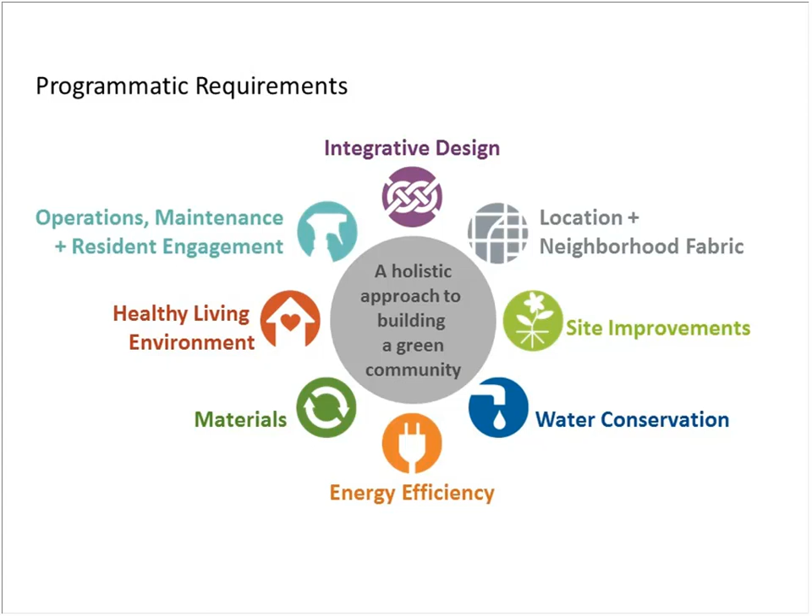While that's happening, this is part 2 of the seminars for Zero Energy Ready Home. In part 1, we gave you the business case for why affordable housing stakeholders should be really excited about building Zero Energy Ready homes, how incredibly aligned that product is with their mission. And we showed you the simple lift to go from the Enterprise Green Community Guidelines to move up to the Zero Energy Ready Home specifications.

Today what we'd like to do is give you tools so you can actually do this successfully, and that's going to be the Building America Solutions Center. But to begin, I want to once again review the fundamental building blocks for how we get to zero. So what is zero? How do we get there is the first discussion I want to cover before I hand off to my partner in crime, Chrissy.

So it all begins with this new risk reality. Codes have been moving along, and as you can see over time, the vertical axis is the energy use index. The index keeps getting lower and lower, meaning that the codes themselves are getting much more rigorous. In fact, if you look at the difference between 2006 and 2012 International Energy Conservation Code, the rigor has increased almost 40%. The codes have really gotten to the point where we're building a much, much more efficient home.

And in the process, that has put us in the risk zone. So a lot of what we're doing with the Zero Energy Ready Home specifications is addressing the risk and the opportunities to provide truly affordable housing to American homeowners. So let's look at how we address that risk.

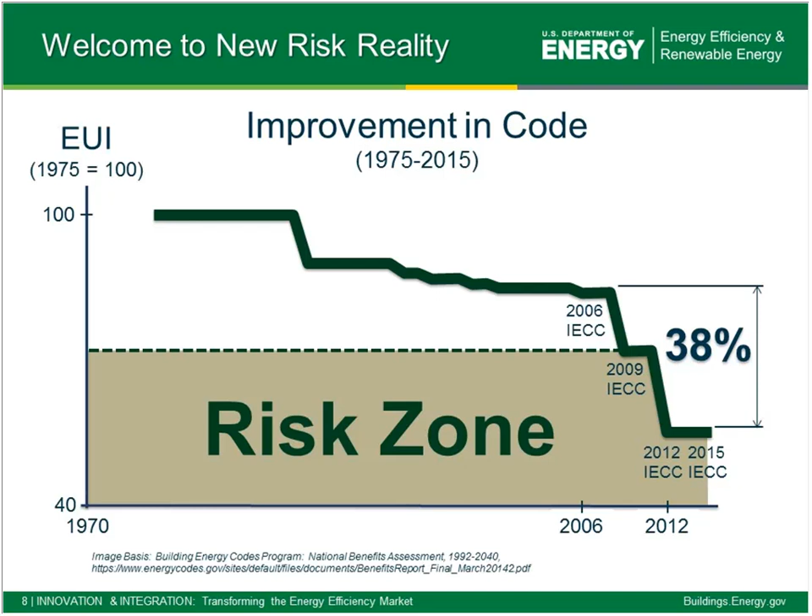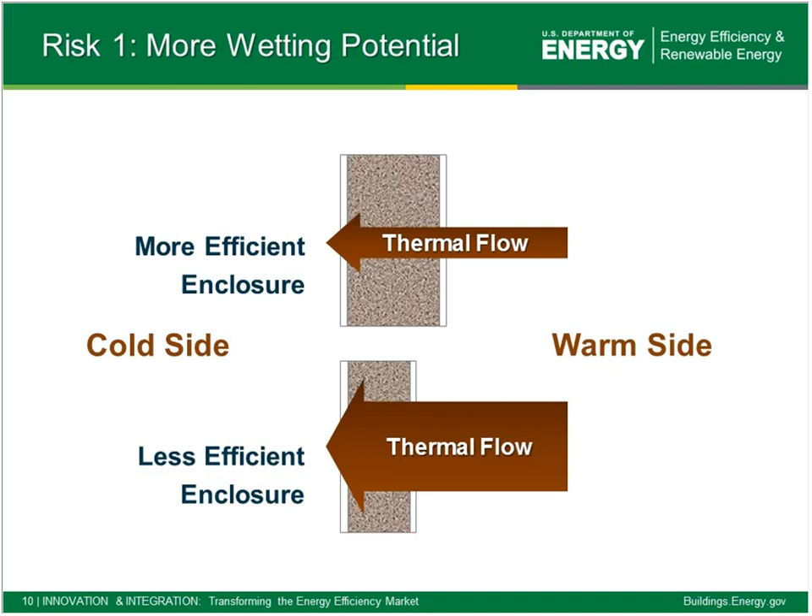It starts first by recognizing that this advanced enclosure, even with a code home, is much better insulated and much more airtight. So we have a diagram showing a more efficient enclosure assembly in the top, a less efficient enclosure assembly in the bottom. And if we have a warm side and cold side, heat flow goes from more to less heat, and so we have a lot more thermal flow going through a less efficient enclosure than through a more efficient enclosure.

And the result, of course, is that we now in high efficient enclosures have much colder surfaces inside the cavity on the cold side of the building. And that's only because there's so much less heat flow and airflow going through the assembly. And that's just a reality we have to live with. So that means if the building is built more efficient, it can't dry, and therefore it has no tolerance to getting wet. And so we have to address this risk of a greater wetting potential since it doesn't dry.

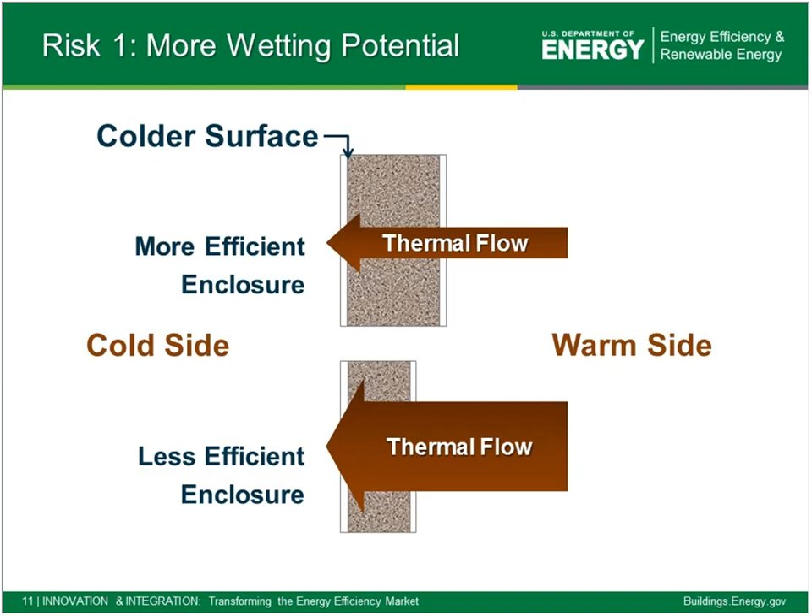Which brings us to risk number 2. Again, we have a lot more thermal flow going through the less efficient enclosure than the more efficient enclosure. And what that means is that we need a lot less BTUs, a much smaller BTU machine, which most of us call heating and cooling equipment. So you need a much larger comfort system for the less efficient enclosure and a much smaller comfort system for the more efficient enclosure, which needs a lot less heating or cooling BTU for comfort.

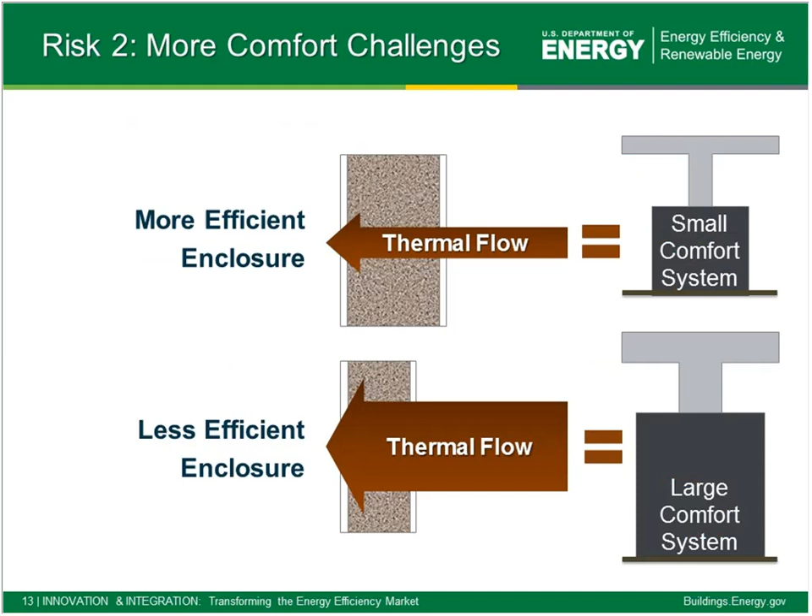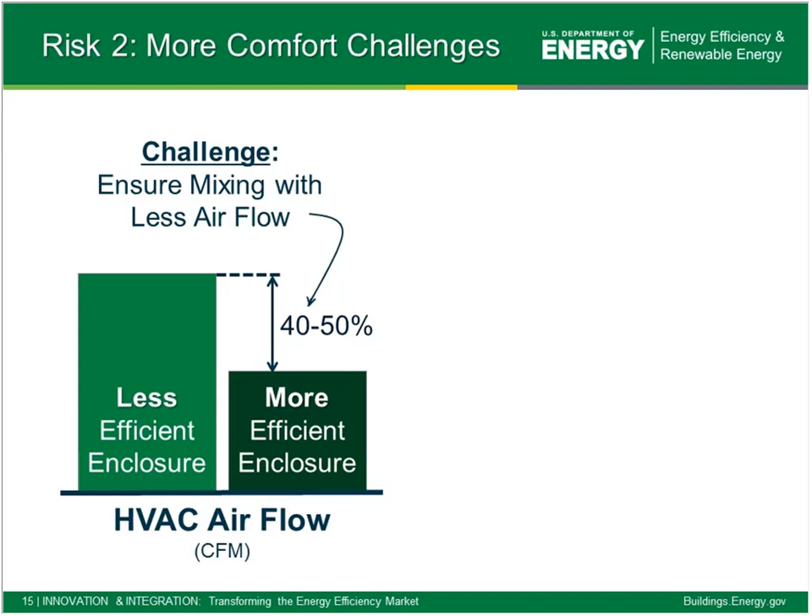And a couple things happen from this. First, there's about 40 to 50% less airflow in the more efficient enclosure because there's a lot less heating BTUs flowing into the building from the equipment. And that's an issue or a challenge because we, up to this point, are not very diligent designing heating and cooling equipment systems that move air efficiently. We don't design the ducts, we don't manage static pressures, we don't ensure proper mixing in the room, and so with that reduced airflow, that challenge is even more difficult. So we have to make sure that we address that challenge.

The second challenge is based on the fact that the more efficient enclosure has a swing season that's 2 to 3 months longer than the less efficient enclosure. In other words, you may not start heating into November instead of October. You may not start cooling until the middle of June instead of the beginning of May. So you wind up with maybe 2 to 3 months where you have no space conditioning load. And the challenge there is, where's the humidity control going to come from when there's no sensible cooling load? And normally a lot of dehumidification depends on the accidental byproduct of the cooling that we're getting from a sensible load.

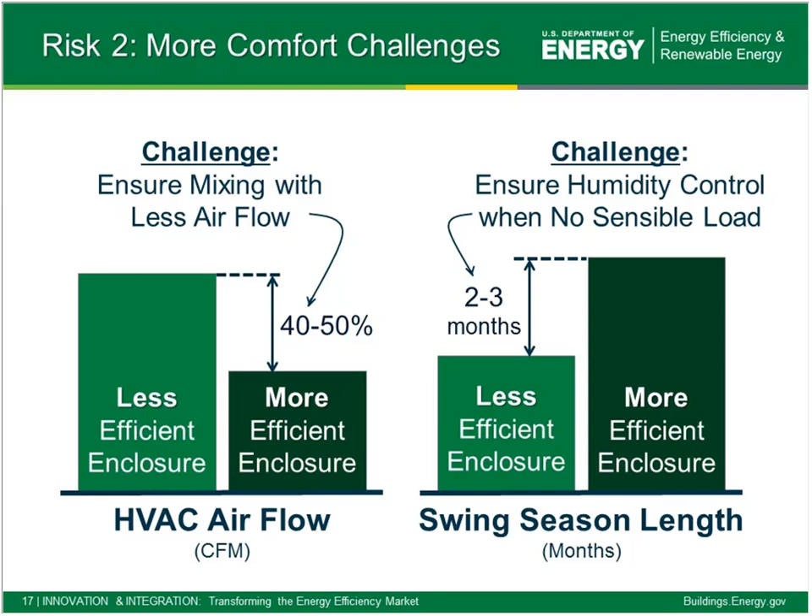And that brings us to risk number 3, which again starts with the fact that the more efficient enclosure compared to the less efficient enclosure is built with much more insulation and a lot tighter, so there's a lot less airflow in the more efficient enclosure than the less efficient enclosure. And that means that we're not getting the same amount of dilution, and so we have a lot more potential to accumulate contaminants in the more efficient enclosure. And we have to manage that risk as well. And it can be code, above code.

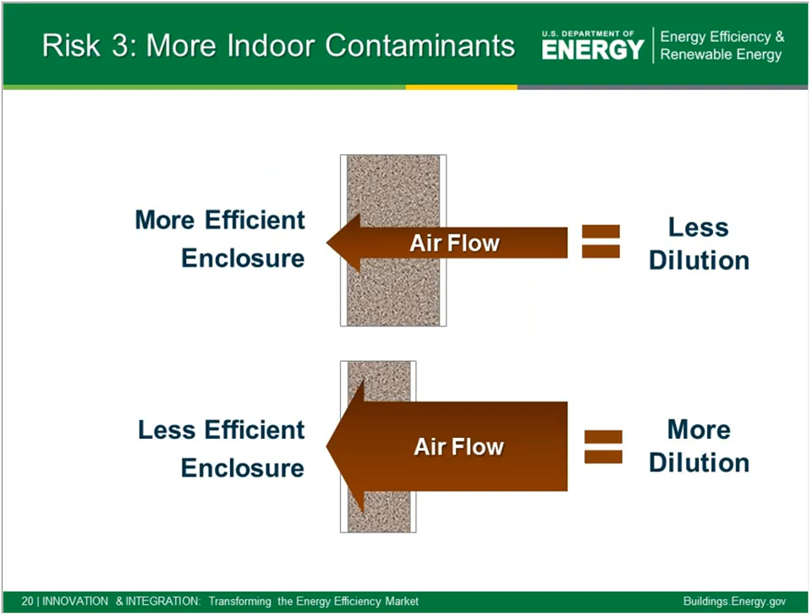This is the new reality that we're in. And this drives a lot of what we're trying to do with the Zero Energy Ready Home specifications and what we think fundamentally creates the building blocks for how you get to zero. It's basically a risk management strategy.

So most cases you're starting with code. We recommend it's not affordable to build to code. You want to build to the next code cycle that's already coming down in the future, locked in to happen. It's like building a home for a family that will be obsolete or even illegal to build in 3 or 4 years if we build to the current code and not a future code that's already in the books and more efficient. That's just not affordable to strap a low-income household with a product that will be obsolete.

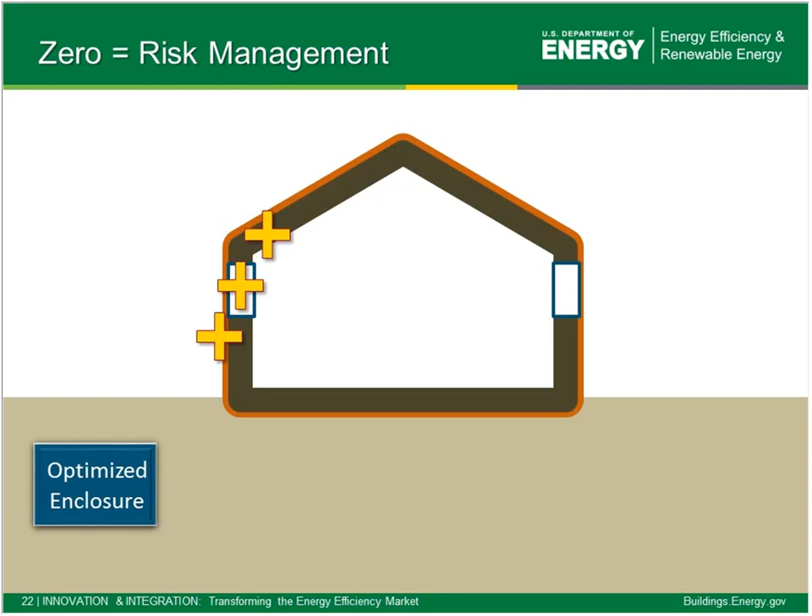So we want to build to the next generation code, what we call an optimized enclosure. And generally that will have a little more air tightness, a little more insulation, a little better window, but we're optimizing the enclosure cost effectively. And that's really important in optimizing efficiency.

The second thing you want to do is address that the total energy use leaves more than 50% consumption for all the things inside our home, equipment, appliances, fans, lighting, plug loads, all those things are now accounting for more than 50% of the energy use, so we need energy efficient components throughout the house. These two strategies together ensure an ultra efficient home. What a great start. Absolutely where you want to be for an affordable household.

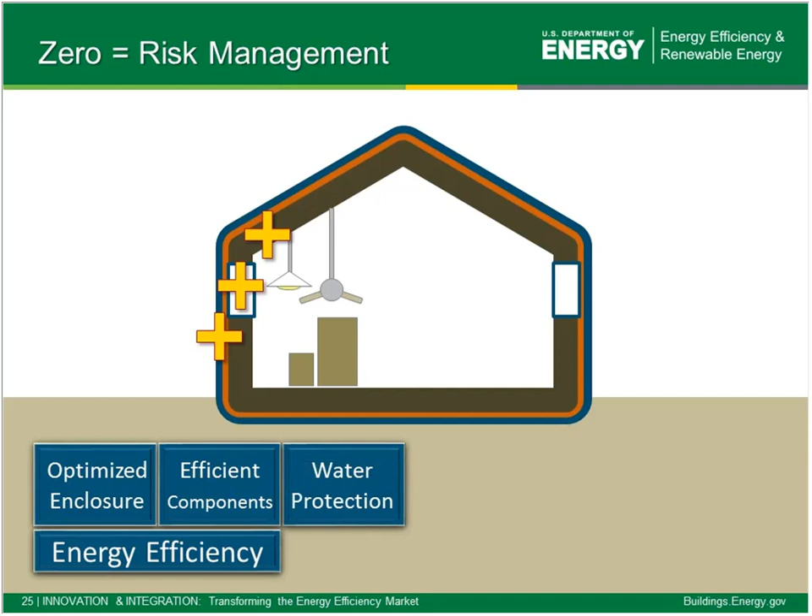The next building block is complete comprehensive water protection to manage that risk that the building cannot dry if it gets wet. Too well insulated, too little drying potential, there's no room for mistakes. You need comprehensive water protection.

The next building block is ensured comfort, a system that actually ensures airflow, mixing, and humidity control during longer swing seasons, particularly in climates that get humid in the summertime. So you want an ensured comfort system, absolutely critical for affordable housing or any housing.

And the third building block is a comprehensive indoor air quality package, including source control, keeping pollutants out of the materials we're using and stopping them from entering the home; dilution through a fresh air system that effectively dilutes contaminants that still can gather in the home; and finally high capture filtration, so you actually remove very significantly impactful particulates in the air that really account for most of the respiratory illnesses that can happen in homes.

This bundle of improvements is basically our performance package that helps us manage the risks we talked about.

And finally, the last building block is that the home is so ultra efficient, has such low energy use, and such good performance, it's ready to last and provide total performance. But wouldn't it be great if it can meet the future opportunity to go to zero as solar system costs keep getting lower and lower? Even for affordable households, shouldn't they have the opportunity to go to a zero energy bill? So simple low cost, no cost details and practices enable that to happen, and they comprise a zero-ready solution.

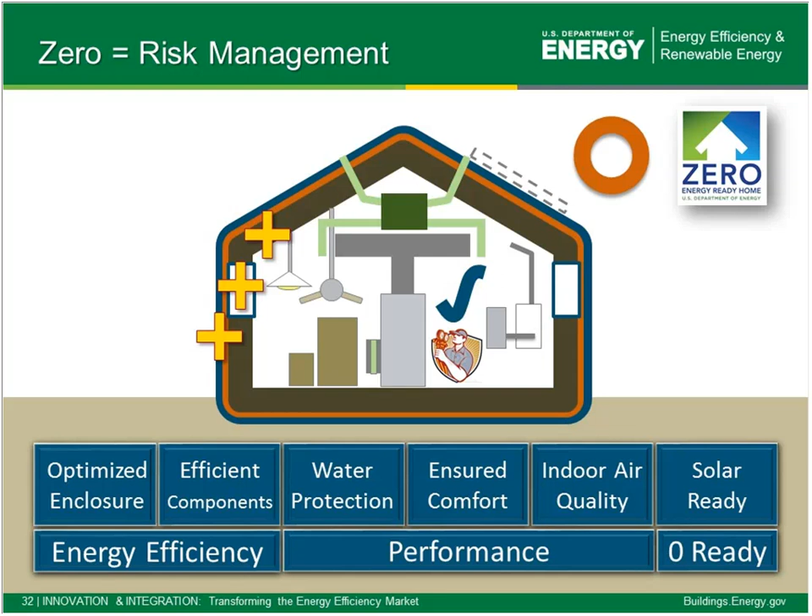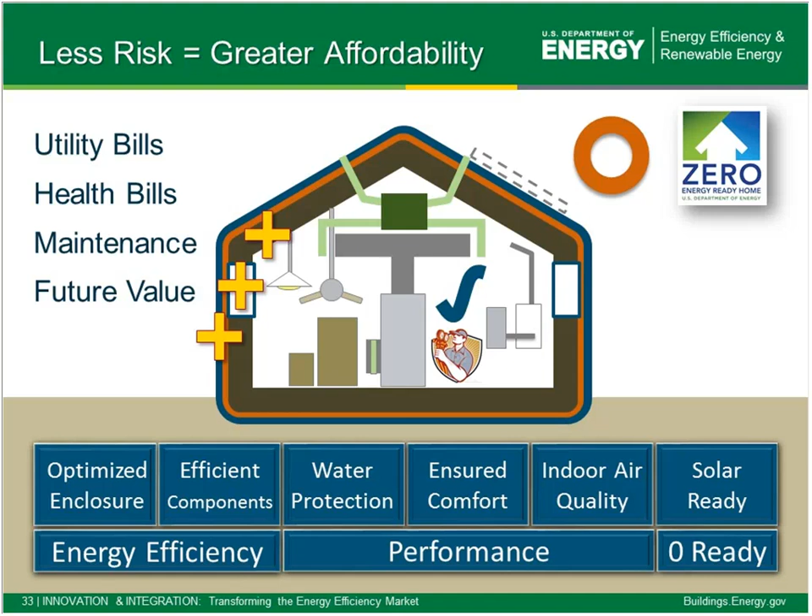And the greater affordability outcomes will be lower utility bills, some opportunity to really significantly improve health and lower health bills for homeowners, substantially reduced maintenance over time, and protection of the family's investment—particularly in affordable households' case—so that their home will meet future expectations, more likely hold its value, and actually have opportunities to appreciate at a faster rate. This is a truly affordable house everyone would want.

So what does it look like in reality? Are we making this up, or is this actually happening in the marketplace? The great news is that it's happening over and over—thousands and thousands of homes are being built this way. Here are just a few examples from the affordable housing sector.

Here's a Habitat for Humanity project in the Grand Traverse region, Michigan. These homes are approximately 1,350 square feet. With solar, they're scoring -1 on the HERS index. The average monthly utility bill was about $9, mostly the service charge just to be hooked up to the utility—and again, almost $40,000 saved over a 30-year mortgage. And again, this quote: 'I couldn't afford to pay for rent and groceries and gas before owning my zero energy ready home.' What a difference for an affordable family.

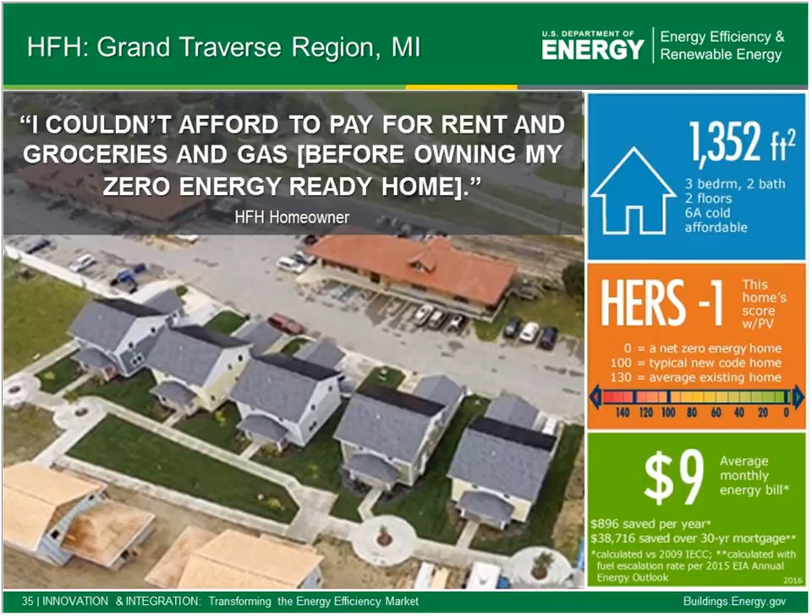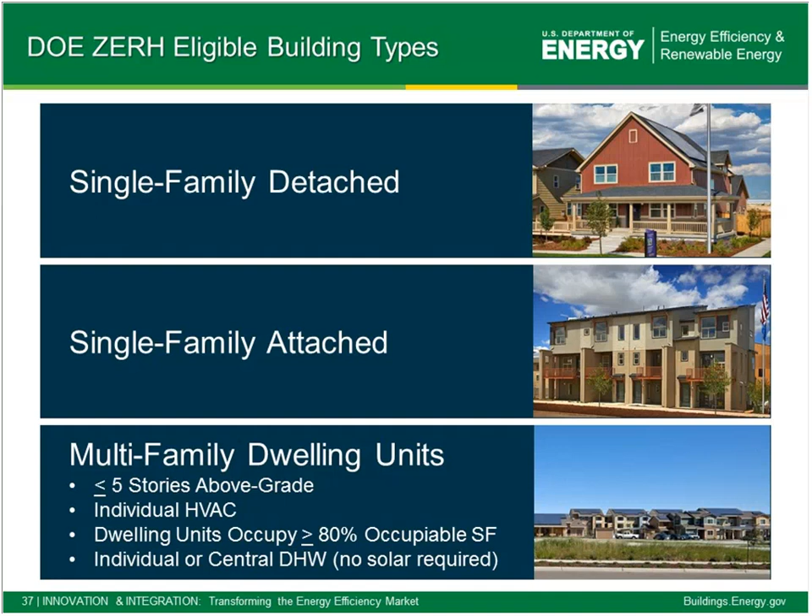So we have lots and lots of these examples, and I do not want to use up any more time except to say: look for applying zero energy ready home strategies for any type of project—single family detached, single family attached, multifamily projects up to 5 stories above grade. These are all ready to go to zero energy ready kind of performance.

And before I hand off to Chrissy, some resources and next steps. If this makes sense for you, go to our website. There'll be opportunities for you to quickly become a partner, review our program specifications in full detail, take the tour and see as many homes as you'd like with all the statistics and experiences featured in the case studies here.

There are over 24 webinars that give you even more detailed guidance. There's a marketing toolkit, and there's a gap analysis between the enterprise green community specifications and the zero energy ready home specifications to clarify the jump between them. And lastly, the greatest resource on the website is the Building America Solution Center. This is your new best friend if you have anything to do with high performance housing, with many applications, solutions, and ways to use this tremendous resource.

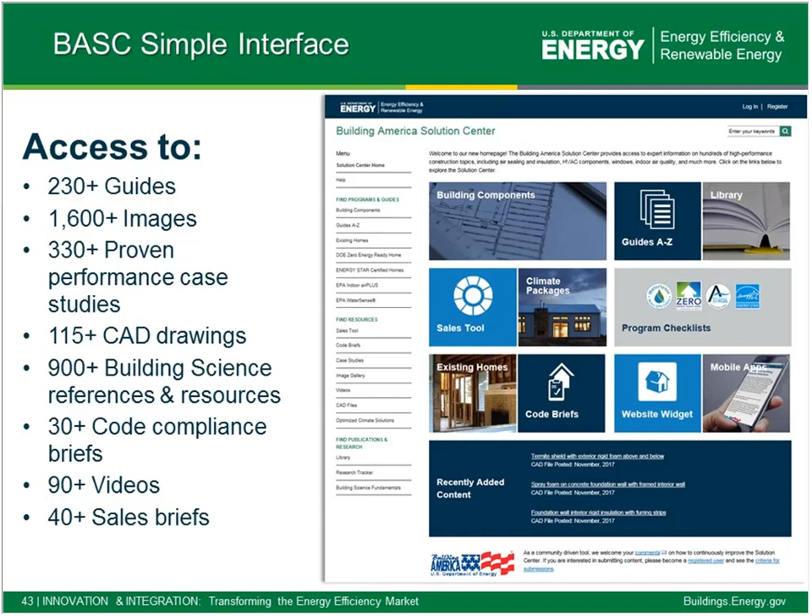Each guide is formatted in the same way, with tabs across the top. Each tab provides specific content within the guide. I'm going to walk you through those tabs and talk you through how we specify each of these.

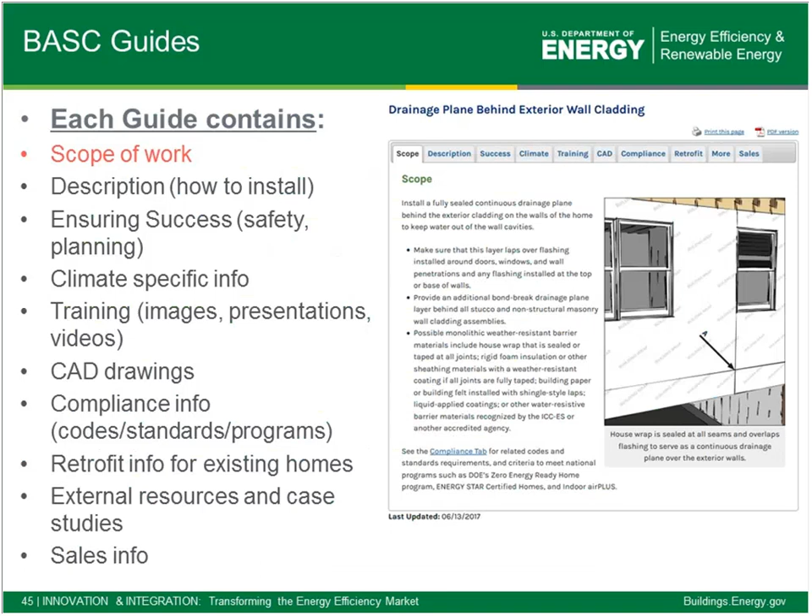The first is called the Scope tab. It's a scope of work, really designed to be a succinct how-to for applying a measure that you could put directly into a scope document for a contractor or a builder.

The second is the Description tab. This is step-by-step instructions for how to install the particular measure. We'll give you images, links to Building America research, and step-by-step instructions as well.

The Success tab will provide you with background information. It'll also provide health, safety, and planning information — anything you need to know before or during the process of installing the particular measure.

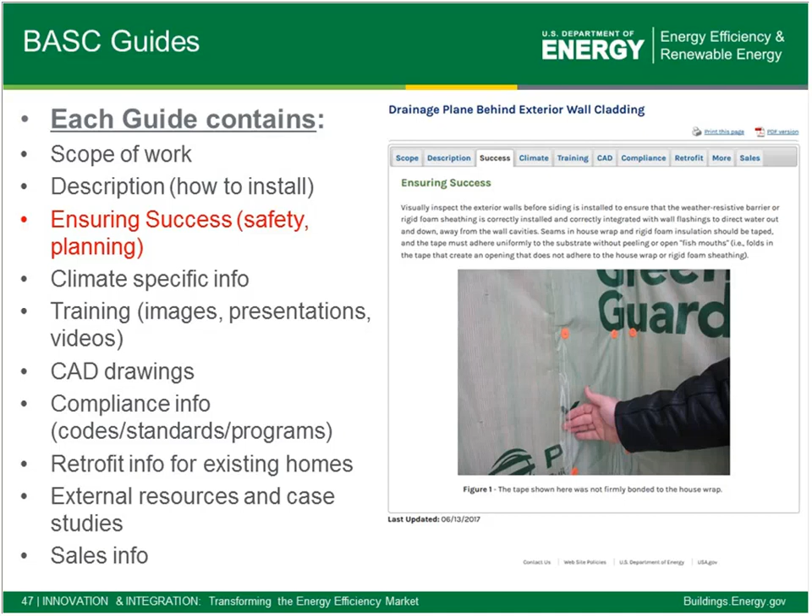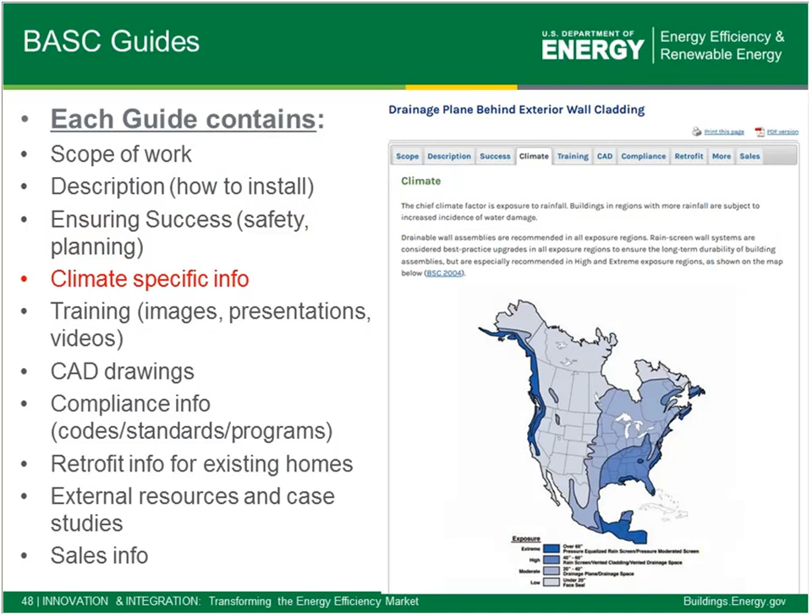If there are climate-specific details associated with the measure, you're going to find that on the Climate tab, where we break down what those details are and where we talk about how you would install differently in that particular instance.

The Training tab is going to give you a list of right and wrong images. You can pull these up directly in the tab, download them, save them, and bookmark them. It's also going to give you a list of presentations if they're available, and also installation videos as well.

The CAD file tab is going to give you all of the CAD files associated with that measure. It's in a gallery format, so if you click on any one of those CAD files, it's going to open in a larger format. It's going to give you the DWG file extension if you have AutoCAD software that you want to download it directly into, and it's also going to let you save a PDF of the CAD file if you just need that for later reference.

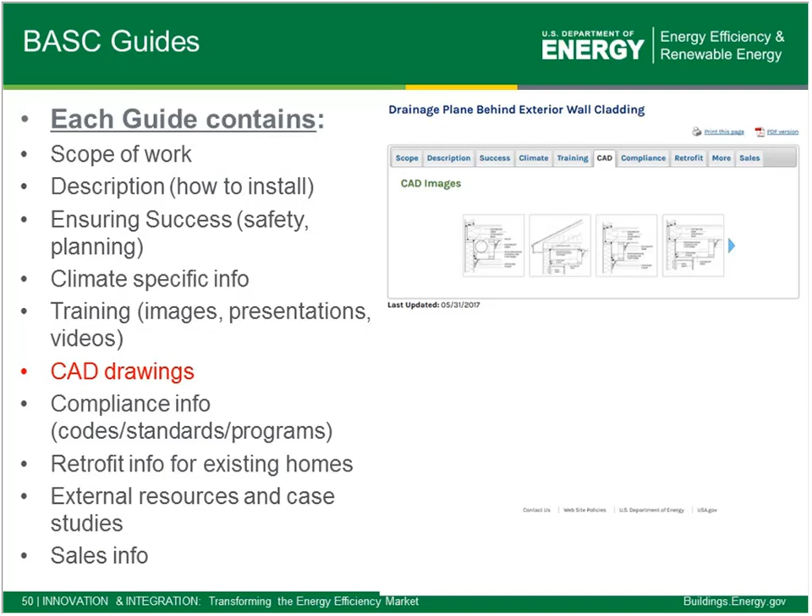The Compliance tab is going to give you specific detailed information about codes, standards, and national programs such as Energy Star and Zero Energy Ready Home.

The Retrofit tab is going to be information for existing homes. We started this tool with a very new-home-specific lens, and we have recently built out a new tool for existing homes, how to retrofit them correctly. So we've added a retrofit tab on most of our new home guides that will tell you additional language and information you need to know for retrofit applications. We do have some very specific retrofit guides that don't display this tab, but for every new home guide that we augmented, we included this retrofit tab.

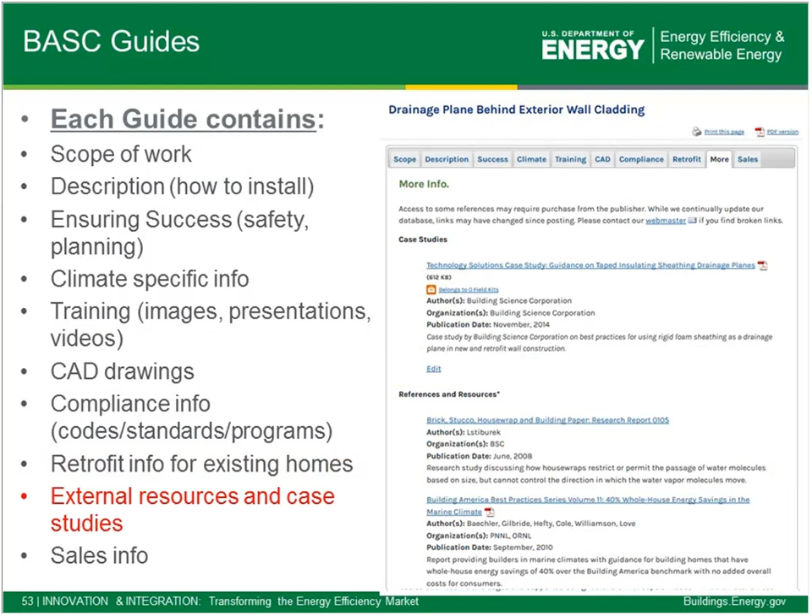The More tab is going to include DOE case studies associated with the measure. It's also going to give you access to additional references and resources if you're interested in some more technical information.

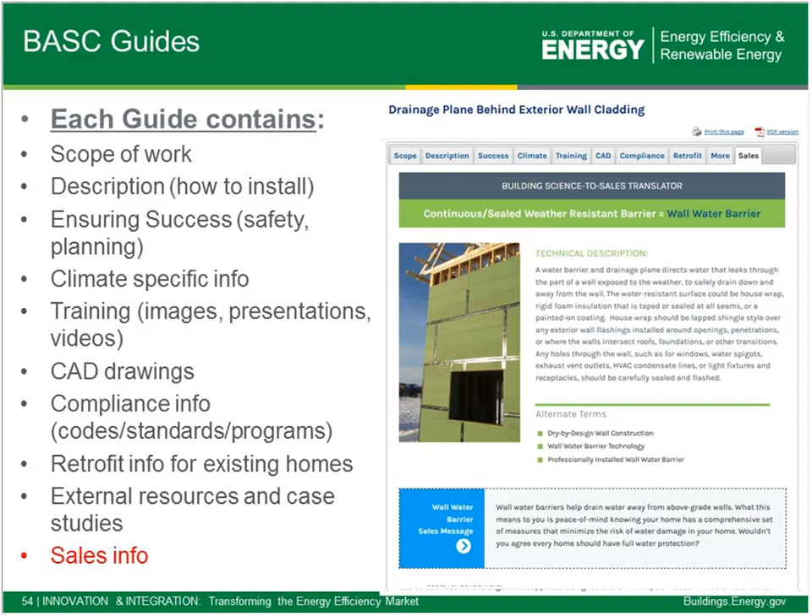And last but certainly not least is the Sales tab. The Sales tab is going to walk you through everything you need to present to your sales team for selling or communicating the value of this particular measure. It's going to give you a basic, digestible technical description that you can use to communicate what the measure is going to enhance in the home to the home buyer or consumer. It's going to give you alternate terms you can use for explaining the measure, and then it's going to give you a sales message that tells you exactly how to communicate the value of that measure to the home buyer or homeowner.

So that is the basic fundamental organization of the Building America Solution Center. I should also mention that all of this content is open source, it is free, and it is available for anyone at any time to download, bookmark, or save. You have full access to the Solution Center at all times. You don't need to register, you don't need to pay a fee. It's there, it's public information for all.

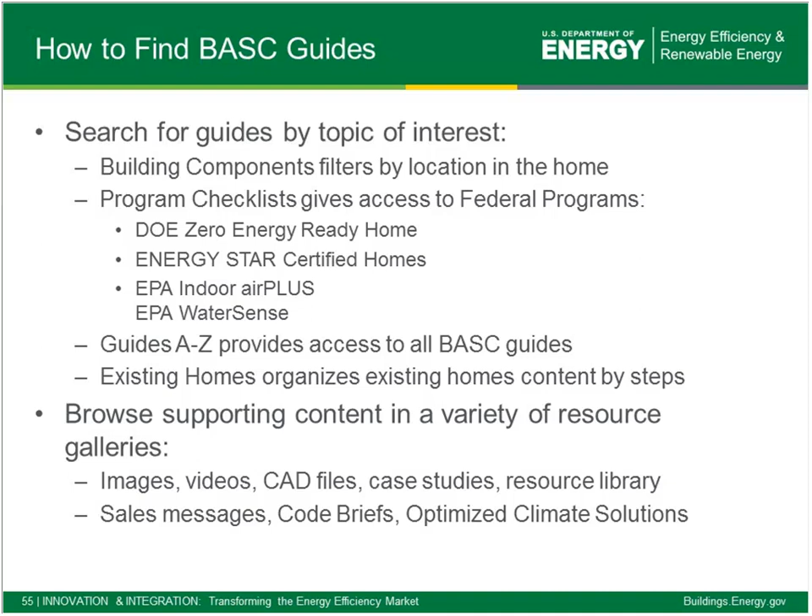So now that we've looked at the basic guide structure, I'm going to talk to you about how to find these guides based on what your needs are and what your objectives are. There's many different ways that you can search content through the Solution Center. This is kind of a snapshot of basic ways to browse. You can browse by topic, you can browse by program, and you can also browse our informational and additional content galleries.

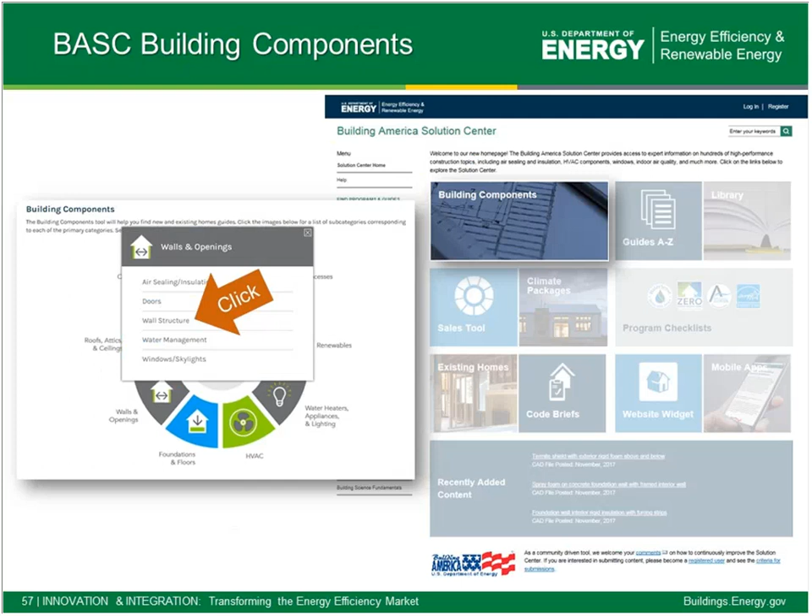So the first thing I'm going to talk about is the building components. This is a snapshot of the home page of the tool, and I've clicked on the building components tool, which gives me all of the guides organized by topic of the home. So let's say I'm interested in wall structures. I'm going to click walls and openings, and I'll get another little window that pops up allowing me to further find the category I'm interested in, in this case wall structure. Then I'm taken to a list of all the Solution Center guides associated with the wall structure of a home, and I can access the guide from that list that I'm interested in.

The second way I can browse is via national programs. We support four primary programs: the DOE Zero Energy Ready Home Program, the EPA DOE Energy Star Certified Homes, EPA Indoor airPLUS, and EPA WaterSense.

The next tool, which is brand new as of this past fall, is the Existing Homes tool. This is a big release for the Solution Center. We have organized Existing Homes content based on the steps to home performance.

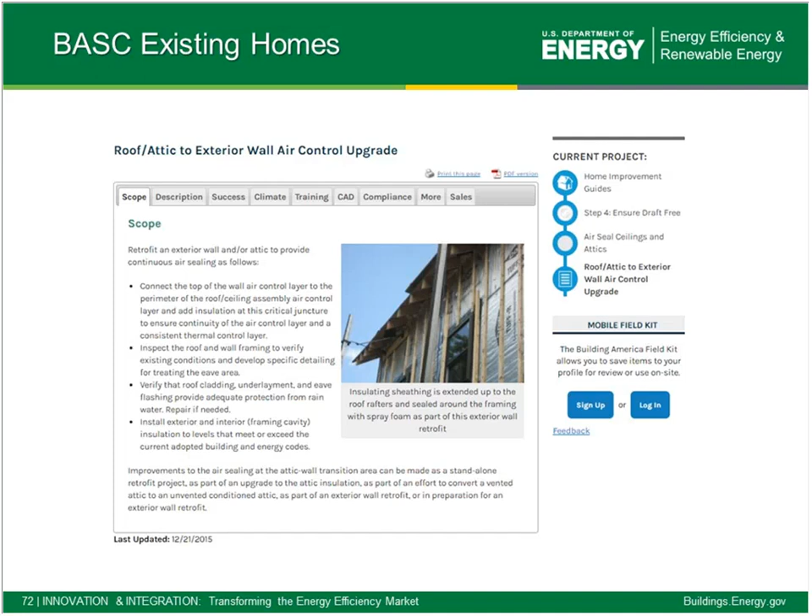The nice thing about the Existing Homes tool is that over on the upper right of the screen, you'll see this current project map. It tracks every click that you make in the tool, so you can easily go back to the step you were on prior if you decide that you want to access a different guide or a different step. Hey, could I just inject one thing there, Chrissy?

Please. Could you go back to the sequence list? One of the things that's important to understand is that these steps are based on Building America research that found out there's a really critical sequence to how you do home improvements.

Not just that you jump right into them. In fact, if you look at how traditionally American homeowners undertake improvements, they do the exact opposite of the sequence they should take. But if you look at the sequence, step number one is first make sure the house is safe and durable - you have combustion air for your appliances, basic things - so you don't start messing with the house before trouble can happen.

Step two is before you start tightening up the house, make sure you have a strategy how you're going to introduce fresh air before it gets tight, some sort of ventilation, what I call a fresh air system. Step three is before you start creating less drying potential and more wetting potential by insulating and air sealing the walls, make sure you have moisture protection - don't get yourself into more harm by making the home more vulnerable to water damage by insulating it. Make sure you have the water protection first.

Step four is then air seal the house so that you get to all the air sealing before you cover it up with insulation, and then cover up all the cracks, holes and penetrations with insulation because now you're sealed - step five. And anytime along that sequence you can change out light bulbs or equipment or water heaters to more efficient ones. It doesn't matter where and when you do those upgrades.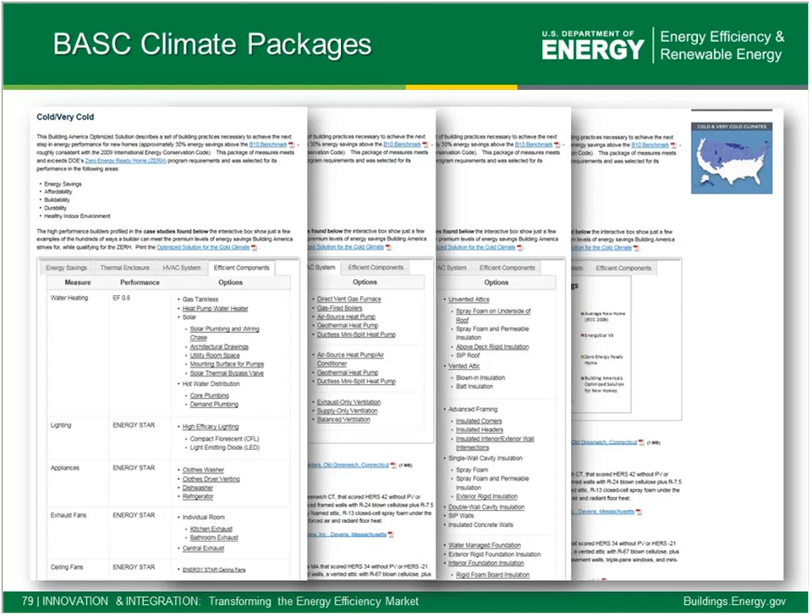You will also have access to the full Building America library. This gives you all of the technical reports, field studies, and case studies that come out of Building America and support all of the content in the Solution Center. This is all peer-reviewed content, best practice content as well.

The code briefs are another newer addition to the Solution Center. Code briefs are available in guides, and they also have their own filter and browser system. There are about 25 of them currently, designed to address and overcome the common code barriers people run into when constructing high-performance homes. They give you detailed references on how to overcome the barrier, provide consistent expectations, and also give you some technical validation.

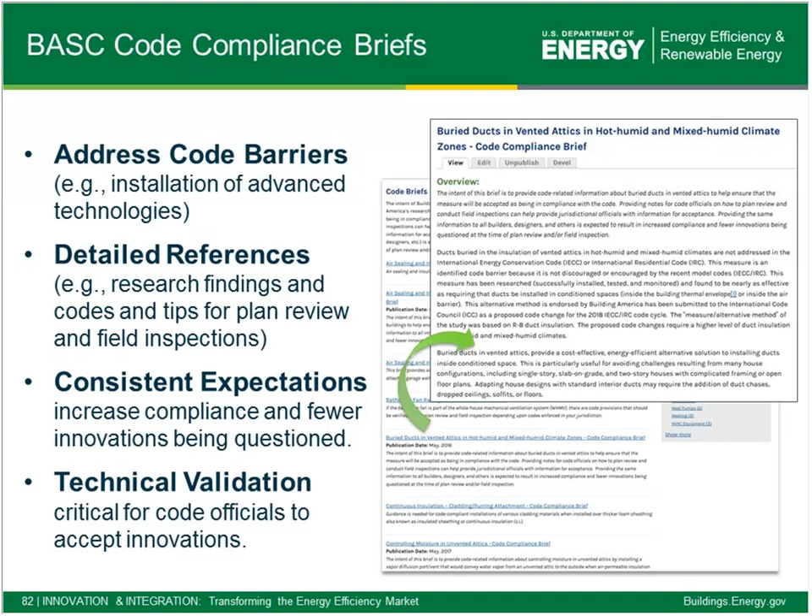So outside of looking at guides and finding ways to find guides, you can also dissect all of the guides through our content browsers. Again, you can find code briefs, and you can look specifically at Building America case studies.

The image gallery is one of our most popular features. We list every image available in the database and give you filters to search through the images, then allow you to save images based on your interests. You can download them directly into presentations, save them in field kits, and bookmark them for later use.

One of the things we've developed to go along with the Solution Center is a mobile application, for both Apple and Android phones, that you can use to organize your bookmarked content. It's available on the Solution Center, and also available through the Apple Store as well.

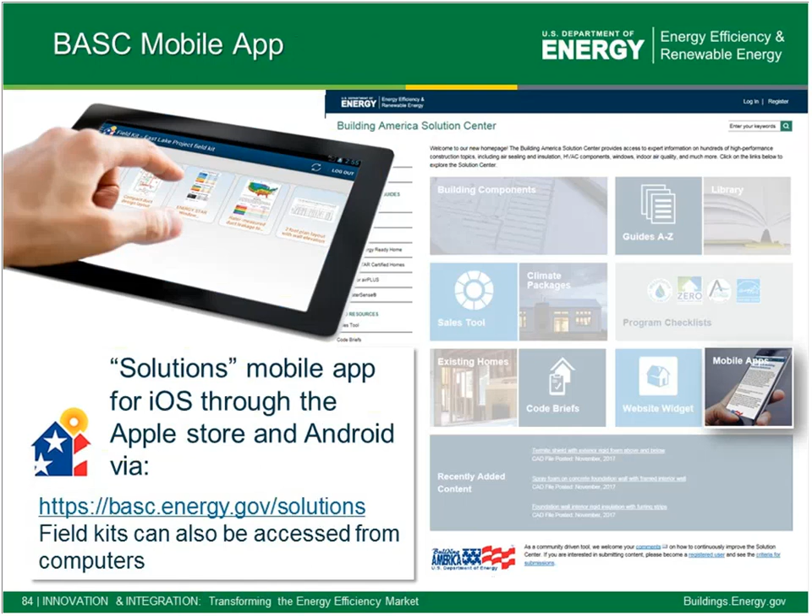In order to download and utilize the mobile app, you do need to create an account. And an account is useful for many reasons. First and foremost, it allows you to create these field kits, which are basically binders or bookmarks, and it allows you to save all of the content that you are interested in.

As you can see, this is a robust database, so going back and finding things sometimes can be difficult, which means building these folders is a very useful tool for many people. You can save CAD files, images, guides, information guides, videos, case studies, sales messages, pretty much every type of content that we create and house in the Solution Center. You can create these guides for it.

So you're looking at an example field kit right now that has some guides, some CAD files, and some images. You can also create these field kits just for your sales messages, if that is your objective. You can create as many of these binders in your account as you want. You can call them anything it is that you want. You can create